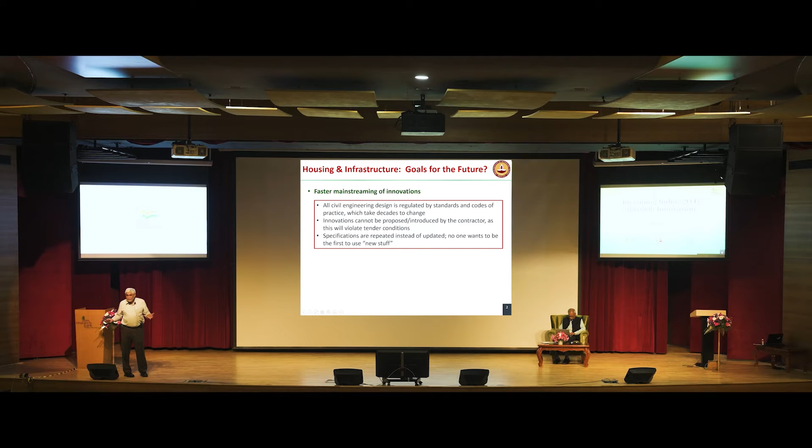Innovations cannot be introduced after the project design is finished. So a contractor who starts the work cannot come up in usual projects with innovations. Suppose somebody finds something amazing, they cannot, because the bill of quantities have been fixed, the specs have been fixed, and we cannot introduce changes at a later stage. Specifications are often repeated. Cutting and pasting specifications is the norm in construction projects.

Nobody wants to be the first to use new stuff. Everyone wants the newest smartphone, but nobody wants the newest concrete because they don't know what will happen. Will it crack? Will it crush? Will it fail? So we have to be sure and sure before we use any technology in construction. So this becomes a tremendous impediment for mainstreaming of technologies.

We need more emphasis on sustainability, as Professor Ashok said. Cement contributes 7% of the global carbon emissions. That's a lot. If we can just work on cement, we are working on 7% of the global carbon emissions. Stone, that is part of concrete, 5.5 billion tons alone in India are required every year. That means we are eating up mountains, we are digging up holes, we are making quarries on our Earth's crust. Tremendous amount of stone is used up.

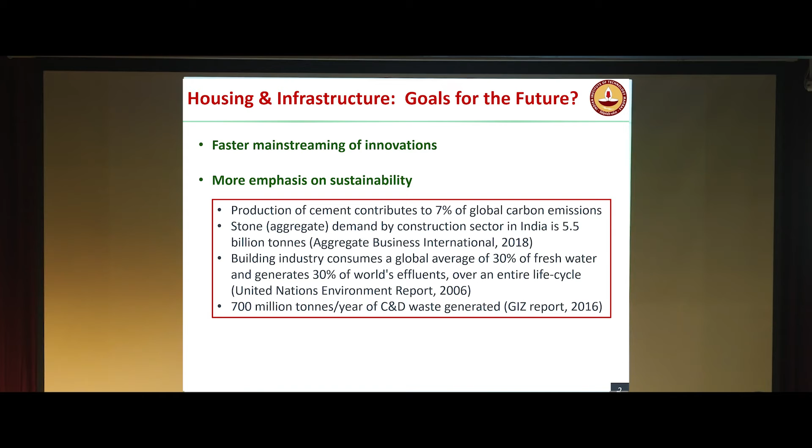The building industry uses 30% of fresh water, 30% of effluents are coming from construction. So if we construct less, all these are going to be affected. Every time we demolish, now we've built up all our cities, there's no area available. We have to demolish. Where is it all going? If you've been involved in a project, if you've demolished something at home, where did it go? Somebody overnight takes it somewhere and dumps it. Right? And that is not our problem. But 700 million tons of construction and demolition waste is generated every year globally. So sustainability can have a major benefit if we work on construction.

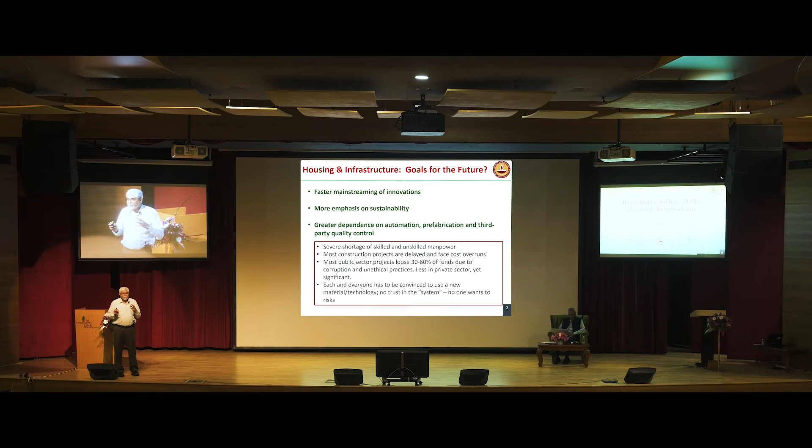Thirdly, we need to have greater dependence on automation, prefabrication, and third-party control. We do things in a very ad hoc manner. We rely on manual labor. The laborer changes every day. If you know about construction projects, somebody takes a truck, goes slightly to a peri-urban area, brings people onto the truck, and those are the construction laborers that day. The next day, it will be a totally different set of people. This is how construction is done.

We thought that we would have a lot of labor because of our population. But at every construction site, if you talk to the construction manager, they would complain that they don't have skilled laborers. They don't have good laborers. So labor is a very, very important thing. So can we prefabricate? Can we make things in the factory and bring them here? This building is a very good example. All the facade that you see is prefabricated. Lot of automation can be brought in when we do prefabrication.

Can we bring in third-party control? Other countries do it. Here, we believe we should control. The administration, the owner believes that they should control. Can we bring in professional third-party quality control auditors? So as I said, there is a severe shortage of manpower in spite of our population. Many construction projects are delayed and have cost overrun.

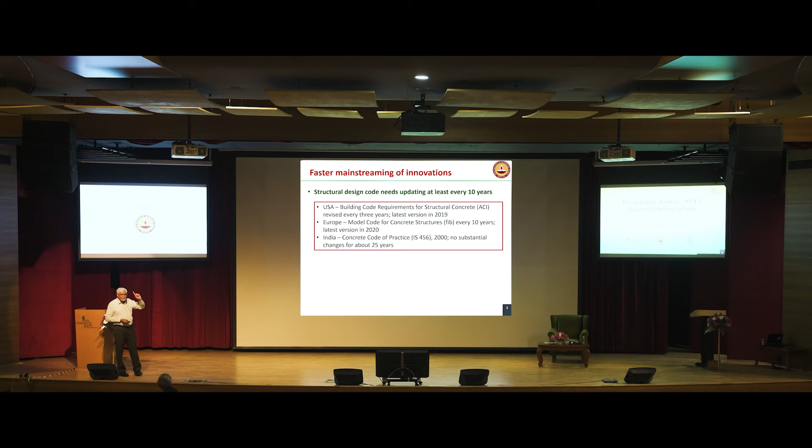So let me take these three aspects and see if we can look at what can be done in future. In terms of mainstreaming of innovations, we need our structural design codes to be modified. Look at these numbers. United States brings out a structural design code every 3 years. The last one is 2019. Europe every 10 years. India, the last design code is from the year 2000.

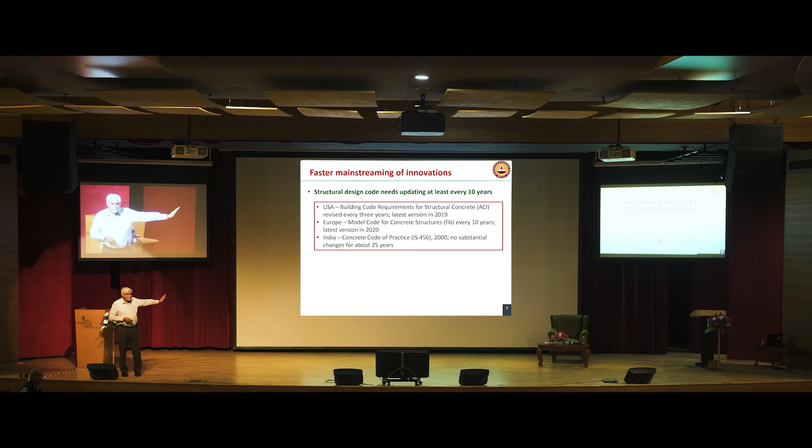So that means no innovation that has happened in construction has gotten into our design code for the past 25 years. We are still waiting for a new design code. That means all construction in our country is being done now as we envisaged in 2000 when this code was written. New materials and technologies have to be adapted more easily. We have a very long process before a new material or technology can go in.

Examples, fiber reinforced concrete, which is used a lot in warehouses. A lot of warehouses were made without proper design because we didn't have a code. Our first code took 10 years. 2020 was our first code that came out. The first code in other parts of the world was before 2000.

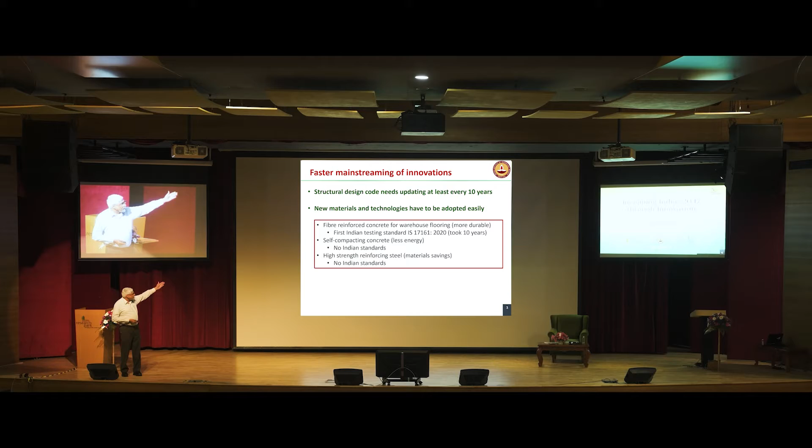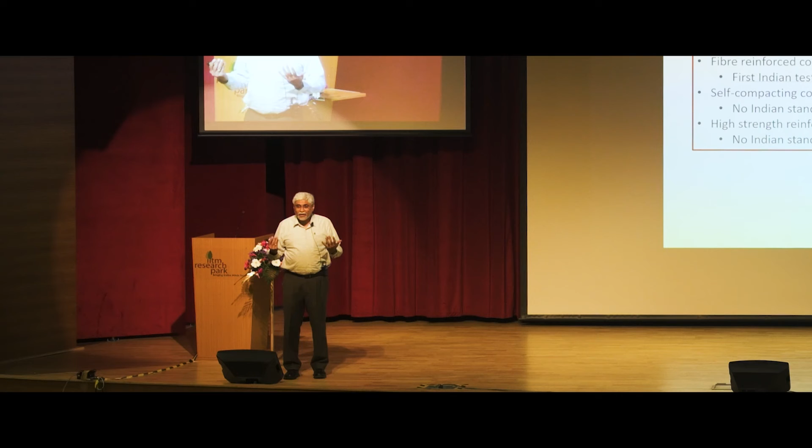Self-compacting concrete, a concrete that does not require energy for compaction. This building has been done with this technology, where we do not use any vibration. All the facades, you can see how the concrete is. No plastering at all, no cladding at all. But this is something that people fear. It could be done here because of IIT Madras, because somebody said we'll put our neck out and we'll get it done. That could decrease the energy.

High strength reinforcing steel, we are still using steel as per the specs of many, many years back. We can reduce our sections, we can use less material if we do all this. We should provide premiums for introducing innovations. Designers should be encouraged to innovate, not penalized if they bring in something new.

Contractors can be allowed to share savings. Can somebody come and say, we can build this cheaper, and we say, okay, we'll share the savings with you, instead of saying that, no, that was the specification, that was the bill of quantities, those were the tender conditions, and you should not change anything. Can we have incentives for faster construction?

So we talk about affordable construction. That for me is a misnomer. You cannot make anything cheaper. A lot of people in this audience may not know that concrete costs 2 rupees a kilogram. How can you make it cheaper? Mineral water is more expensive, common salt is more expensive. So affordable housing is not making it cheaper, it's making it faster, more durable, lasting longer. That is affordable housing. Not making concrete 10 paisa cheaper.

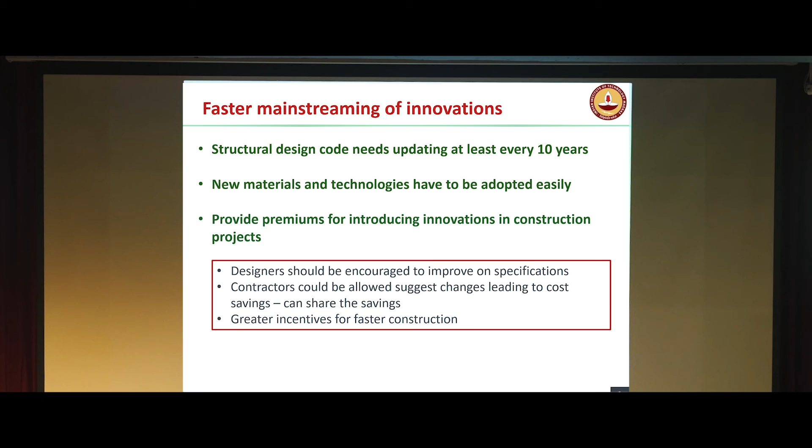So we have to look at incentives for faster construction. Can we give a contractor an incentive if he delivers faster? So these are things. More emphasis on sustainability. As we said, concrete and construction, we can work on. See, this is an example where we have here ordinary Portland cement. This is the cement we use a lot now.

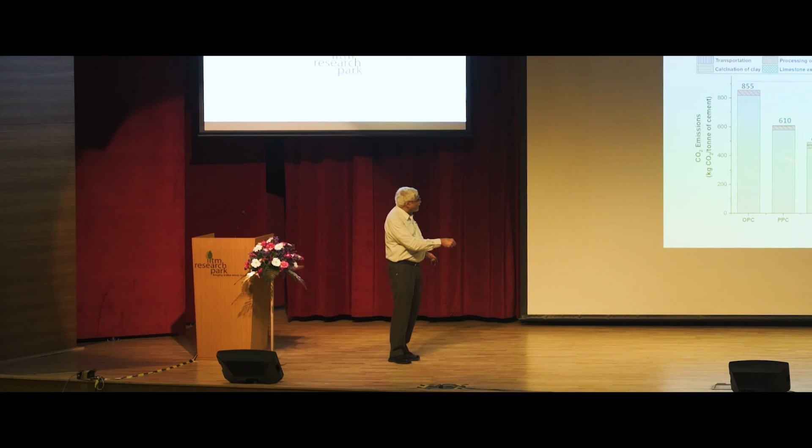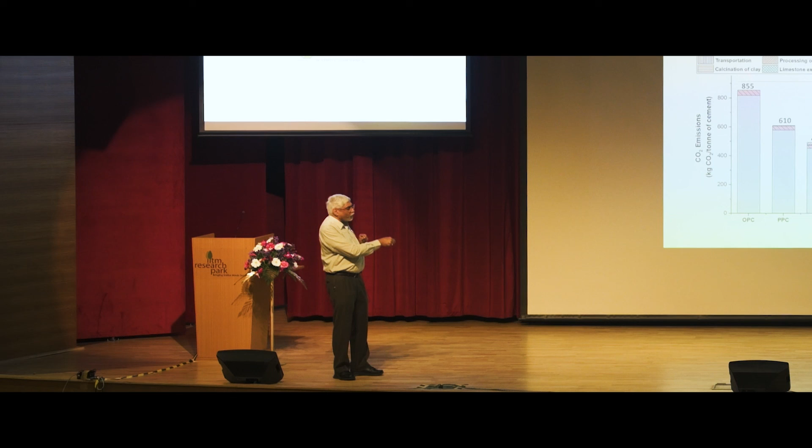These are new cements. You see the carbon emissions, 850 kilograms of CO2 for every ton of cement. That is what we are emitting. We can bring it down. But a lot of resistance, a lot of reticence, because people think this is the pure cement. People want to use the pure cement. We won't use pure gold, but we want pure cement. We can do this.

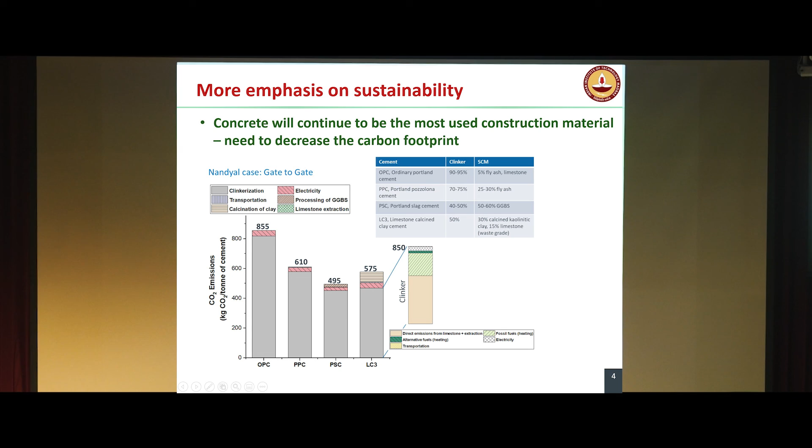In this building, we used fly ash. It was something new. People were afraid what will happen if you put it. But this building stands. So we can do this. There is technology available. We have to design for durability. We design for strength. We have to look at durability.

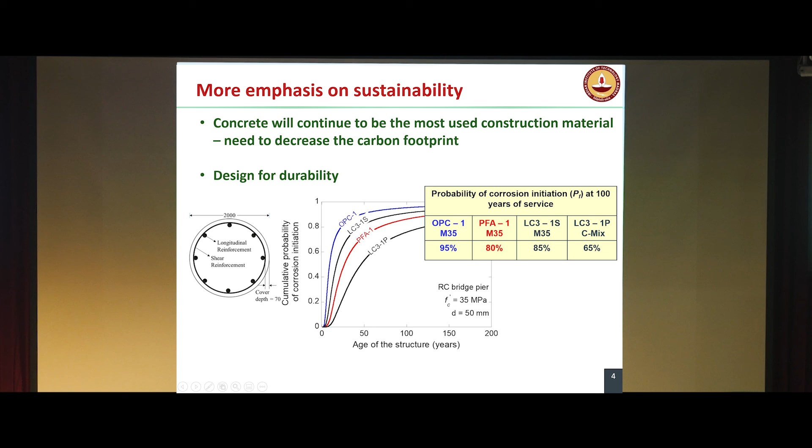Look at this. This is again the concrete we use today. This is the probability of corrosion. In 100 years, 95% probability of corrosion. I can bring it down if I use newer concrete. But we have hesitance.

We have to recycle and reuse. All of our pavements can be made into new pavements using the same material. This is technology that we have. But again, we have the fear. What will happen? Will it work out properly? Can it be designed well?

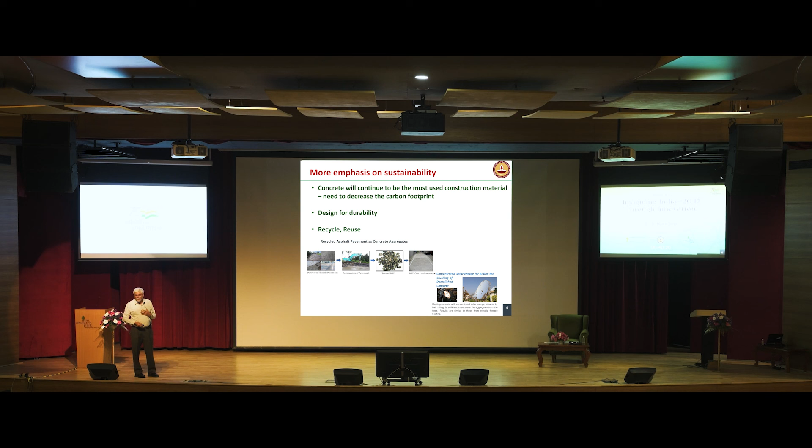This is an idea we've come up with. Can we use solar energy to make concrete weak enough when we demolish so that we can crush it? So this happened because of an idea that we got from Professor Bhaskar Ramamurthi. Then finally we proved it. It can be done. We take chunks of concrete from demolition, put concentrated solar energy, it becomes weak, we crush it and we can use it, make new concrete out of it. So again, it can be done.

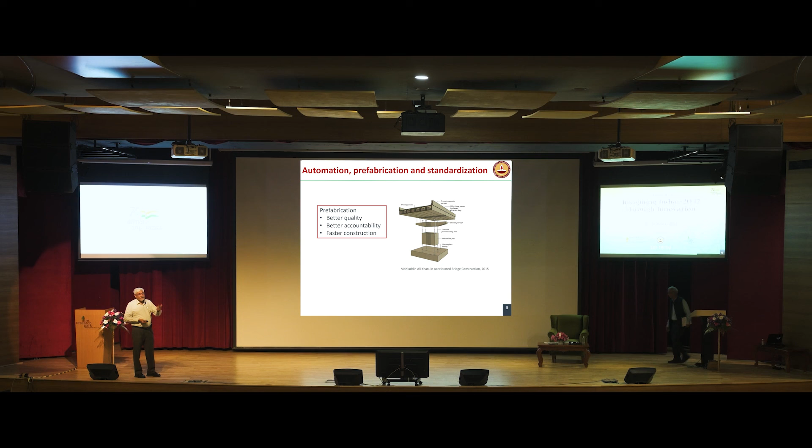Standardization. We have to make things more standard. Construction is very much ad hoc, and if we want to proceed, we have to tax, we have to penalize something that is non-standard and make it more and more standard.